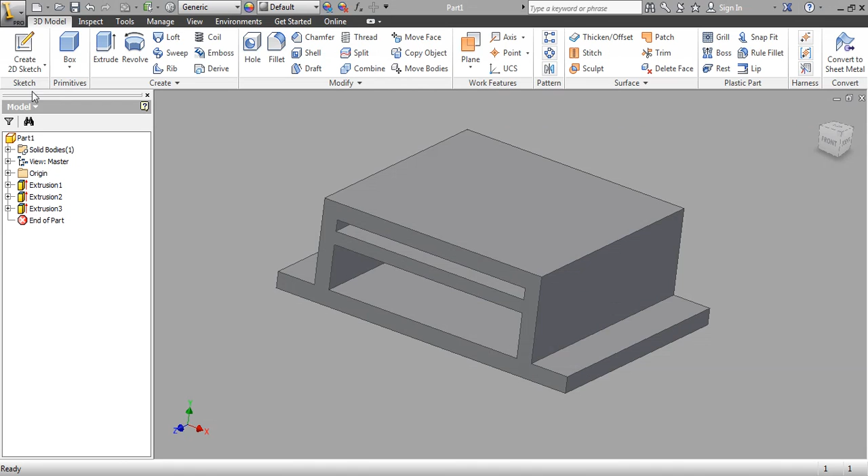In this tutorial we're going to cut out an area here and put 2 holes on each side. The drill's going to be the same: create 2D sketch, select the surface, it comes to here, we zoom in, and we're going to zoom in about there.

Rectangle - I'm going to use center rectangle this time. I'm going to click and just go a little bit bigger than this. So there we go.

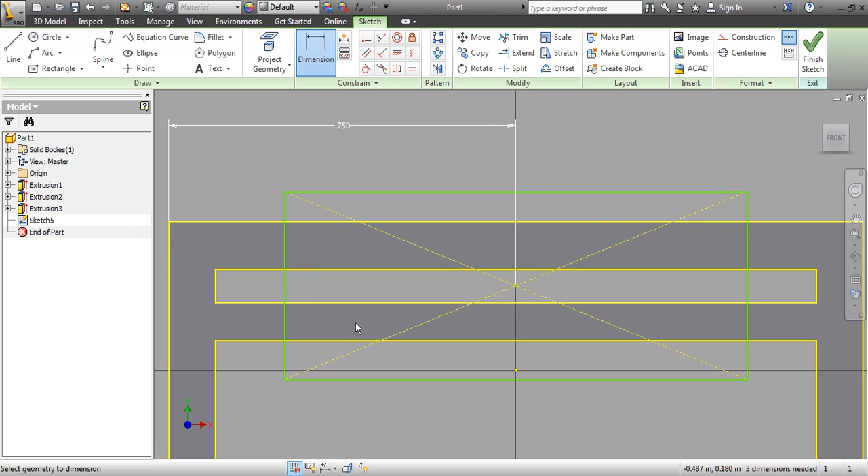And so our dimensions, just to make sure it doesn't move when we do this, from here to here make sure that's 0.75. This up and down dimension doesn't matter because we're just going to remove this material. The other dimension we have is just here, and I know this is going to be 1.1. Okay, so we've got that.

We click on Finish, back to the drill of Extrude, pick that surface - not this one, this one. Reverse the direction to Next. Click OK. So now we have that part.

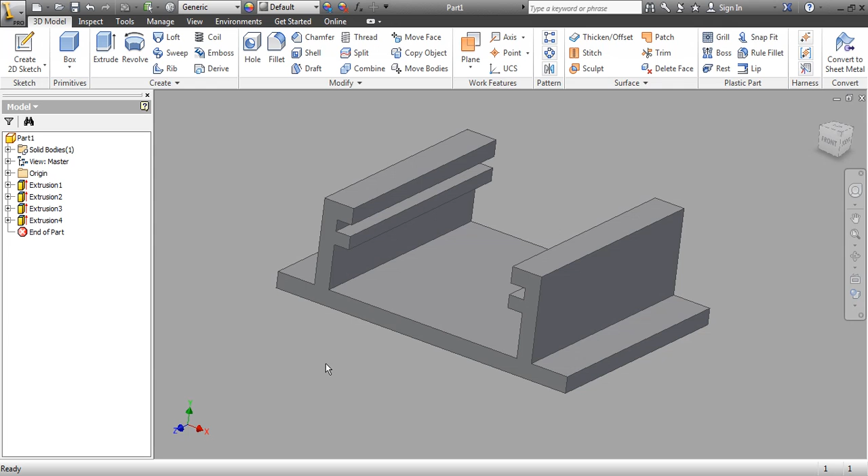And then the last part, what we're going to do is add 2 holes, 1 hole there, 1 hole there. So we're just going to click on the surface, create 2D sketch this time, circle.

Now watch carefully what happens. See if I move this around, you see how it clicks in place - there's those dotted lines. That means it's centered on this area here. And if I come down a bit, there it is centered as well.

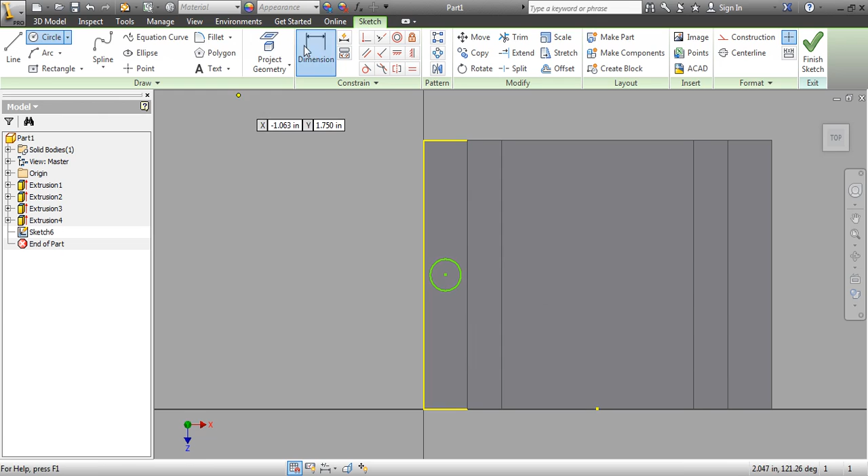So we're going to click once, click again for the hole, dimension it, and this dimension we want it to be 0.1. Now to prove to you that it's centered, we'll just dimension it as well anyway. So from here to here should be 0.125, and then from here to here, because this is 1.5 deep, that should be 0.75. So we're good.

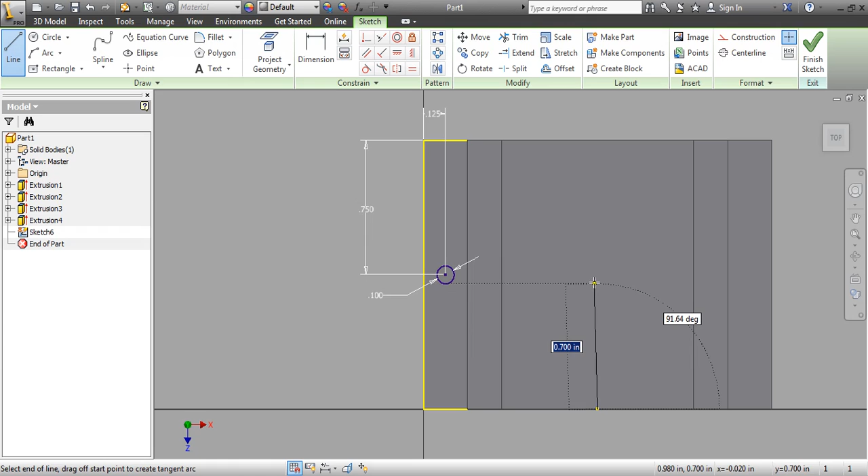Now instead of drawing all that back over there, I'm going to show you how to mirror something. So we're going to create a line - see this dot right here? We're going to create a vertical line like that. Hit OK. Now I'm going to dimension it, but watch what happens.

When I go here to here, it's going to give me an error. It basically just says, do you really want to dimension it? Yeah, we do. Okay, but it's going to put brackets saying, well, you kind of put it on that dot, which meant it was centered, and you didn't need the dimension, but we put it in there anyways. So we've got that in there.

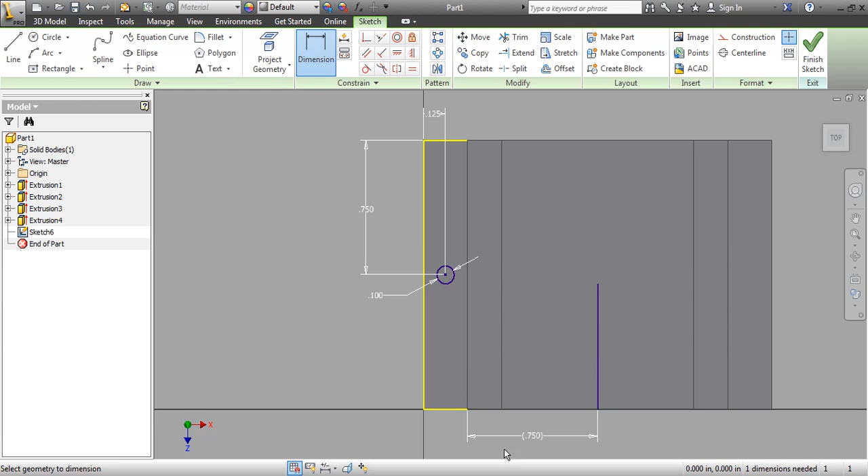Now I'm going to hit Mirror right here. So under Pattern, I'm going to select the dot, the circle. Then I'm going to select the mirror line, select that, and hit Apply, and it goes to the other side. We're going to click on Done, Finish, so it's mirrored across that, so we know it's in the right spot.

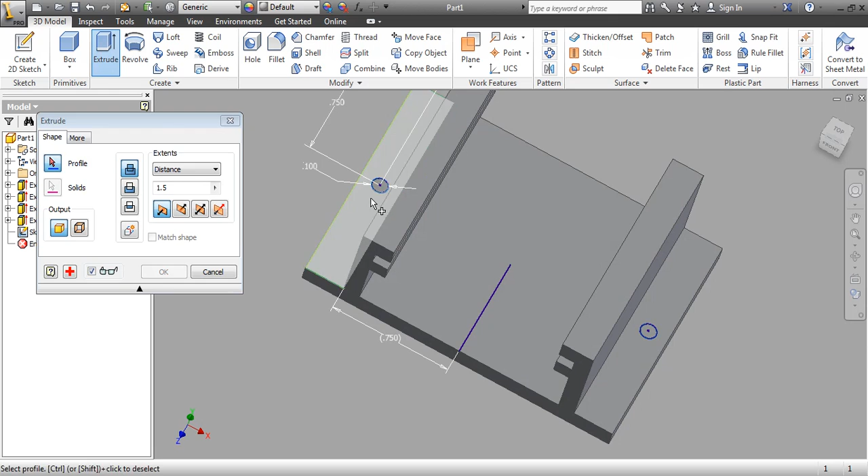And you guys kind of know the drill. We click Extrude, that one there, to Next - you know how it does it now. We click OK, it finishes off, and that completes this part of the tutorial, and we'll go on to the last part in the next session.